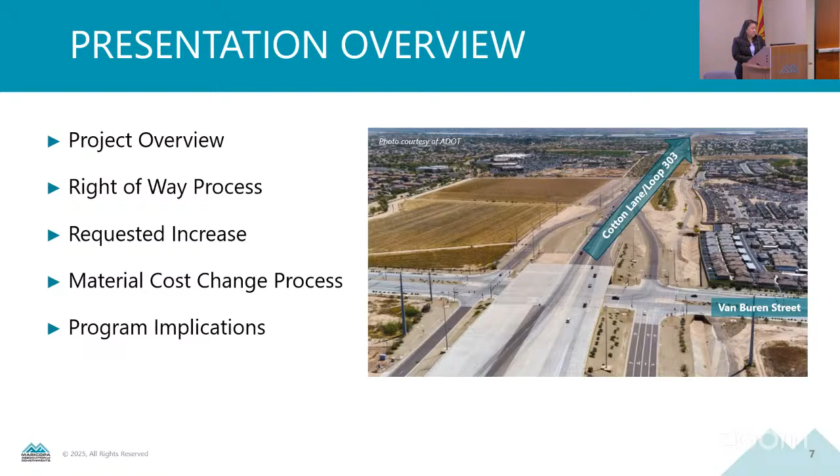I'm here to present the material cost change for Loop 303 from MC 85 to Van Buren Street project. I'll start with an overview of the project and give you a little bit of background about it and how we got to where we are today, as well as the requested increase for right-of-way funding. So let's start with an overview.

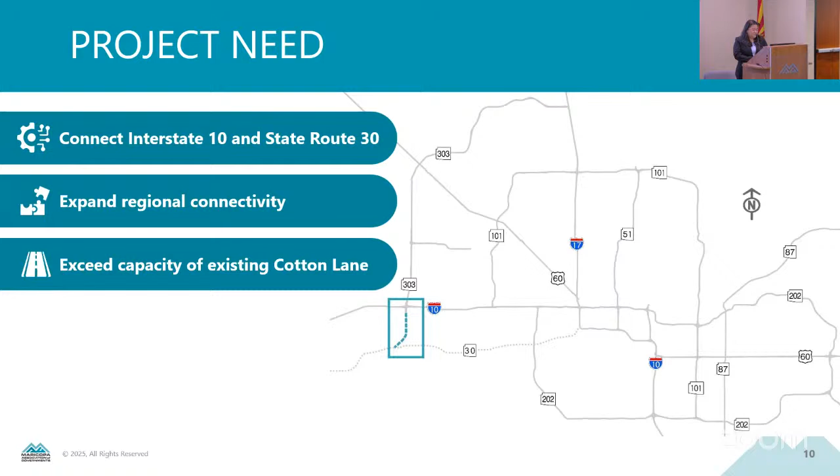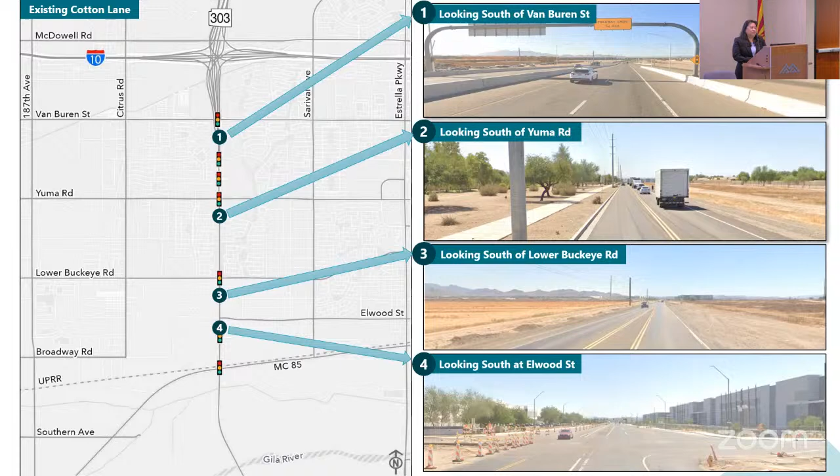Now, the project will be a vital link in connecting Interstate 10 with the future State Route 30. It will expand the regional connectivity in the Southwest Valley. And Cotton Lane today will not be able to meet the expected demand in the future. So Cotton Lane today is generally a 2-lane roadway with 1 lane in each direction, with several signalized intersections in the corridor. Cotton Lane is surrounded by a diverse area that includes agricultural, residential, commercial, and distribution centers.

So ADOT completed the design concept report and identified the project limits as Van Buren Street to Elwood Street. This was the original concept. This would have constructed 2.5 miles of freeway.

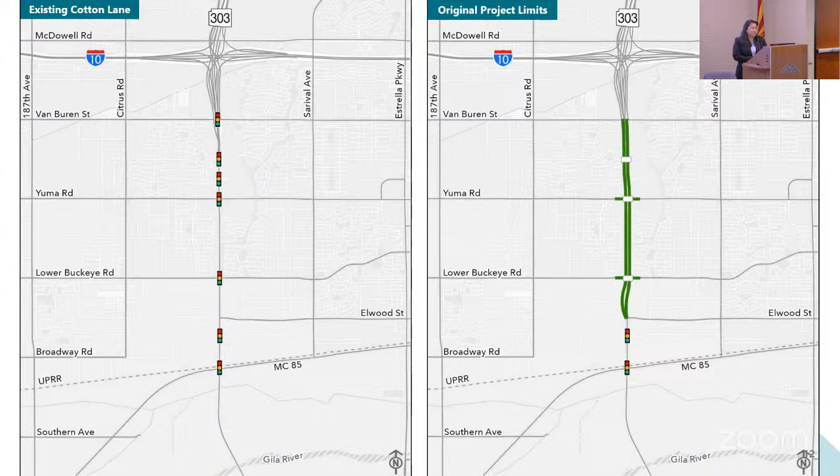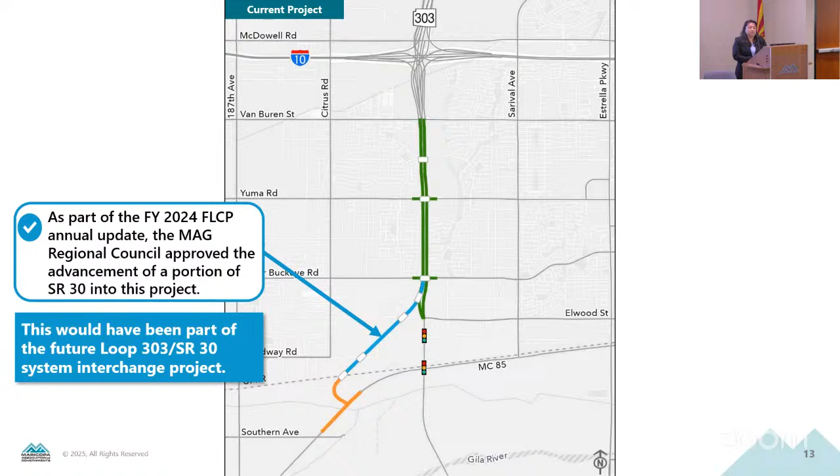Now, as part of the fiscal year 24 FLCP annual update, the MAG Regional Council approved a scope modification to extend the southern limits from Elwood Street to an interim connection with MC 85, shown here by the blue line. Effectively, this advanced a portion of State Route 30 into the current project. This would have been built as part of the future Loop 303 State Route 30 interchange in the future.

The interim connection with MC 85 is identified here in orange. Now, how does this fit with our plans for the future?

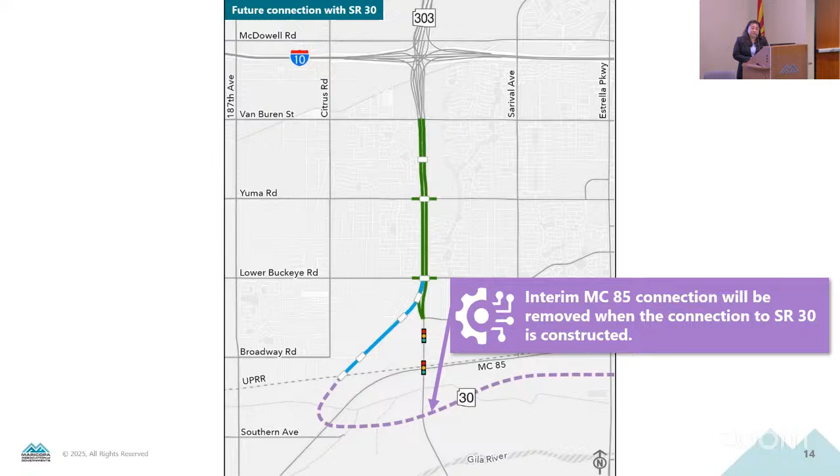So a little more overview: Loop 303, MC 85 to Van Buren Street, will construct 4 new miles of freeway. There will be 3 lanes in each direction north of Lower Buckeye Road, and 2 lanes in each direction south of Lower Buckeye Road. The freeway will be elevated over every cross street, as well as the Union Pacific Railroad. And there will be one-way frontage roads on both sides of the freeway from Van Buren Street to Elwood Street.

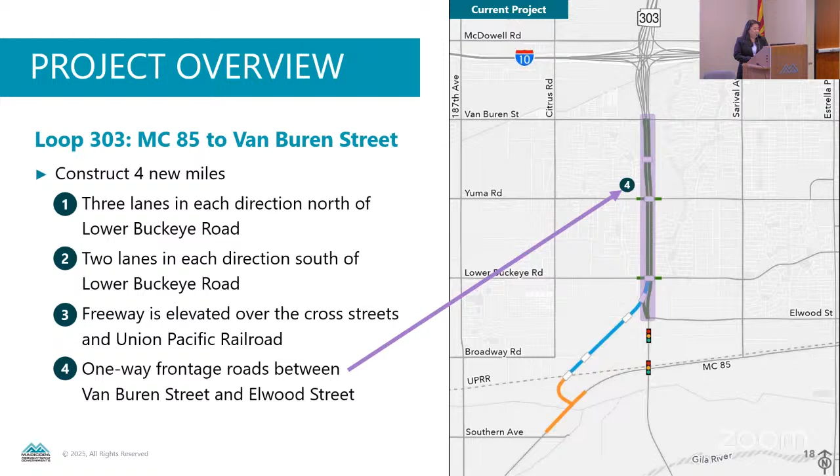Here's the current project schedule. Final design started in September of '21. Right-of-way acquisition began in June of 2022 and is still currently underway. The project is on schedule to advertise for construction in June of this year. Construction will start a few months later and is anticipated to take 3 years.

So let's talk about the right-of-way process. But first, I'd like to take a step back and talk about the overall ADOT project development process. Typically, a project completes a scoping and environmental phase first. This is where the original limits of the project are determined. Then, once that phase is complete, final design will begin. And during final design, there are 2 concurrent processes: utility relocation and right-of-way acquisition. Once clearances are received and final design is complete, then the project can advertise for construction.

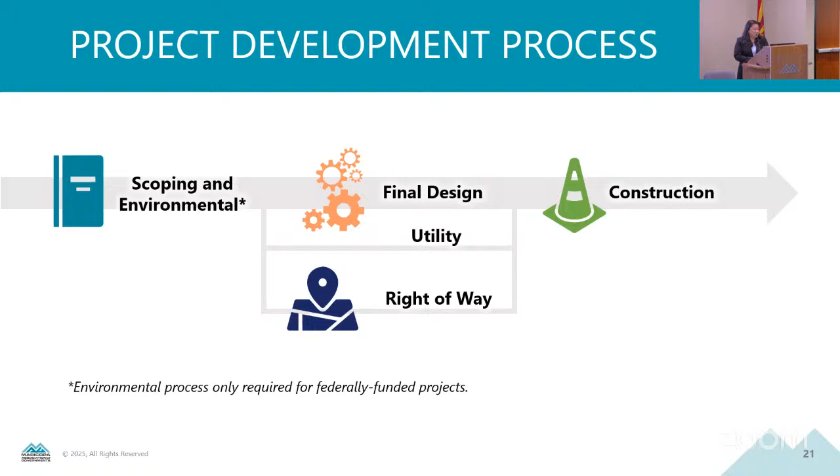So now I'll drill down more into the right-of-way process. During the scoping and environmental phase, preliminary plans are drawn and an early assessment of the right-of-way needs are estimated. During final design, the needs are refined and value engineered, and full and partial acquisition as well as relocation costs are better identified. ADOT will then start to acquire all the necessary parcels, and once acquisition is complete, the right-of-way clearance will be issued.

So based on the DCR, remember that original 2.5 mile project, it was originally estimated that 56 parcels would be impacted. When the limits of the project were extended south, 8 additional parcels were identified, for a total of 64 parcels. As final design refined the needs, that number has actually been reduced to only 47 parcels. But please note the number of full acquisitions increased to 11. So unfortunately, there's no correlation with the decreased number of parcels and the cost of right-of-way. Fortunately, it's quite the opposite.

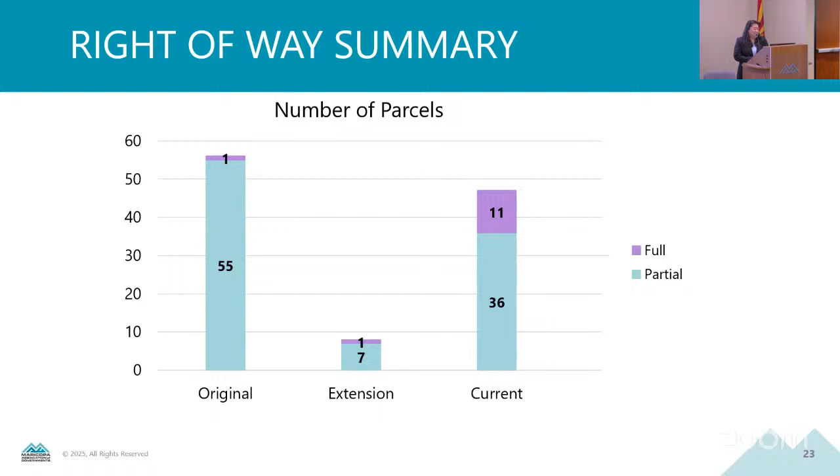The original cost estimate based on the DCR concept was $50 million. Based on actual costs, and the current market trends of the real estate market as well as the housing sector, the estimate today is $170 million. That's a 240% increase. So that leads me to the requested increase today.

I'll touch on the current funding of the project. So it stands as design and utility at $30 million. Right-of-way is currently funded at 94, and construction at $611 million. So that's a total program budget for the project of $735.5 million.

Now, ADOT has requested an additional $76 million. That is a 10.3% increase over the program budget. And if this request is approved, the new program budget would be $811.5 million.

So that large percentage increase triggered a material cost change process. Now, typically this request would be heard as part of an annual FLCP update, but due to the need and the timing of this, the request is being heard independent of that process.

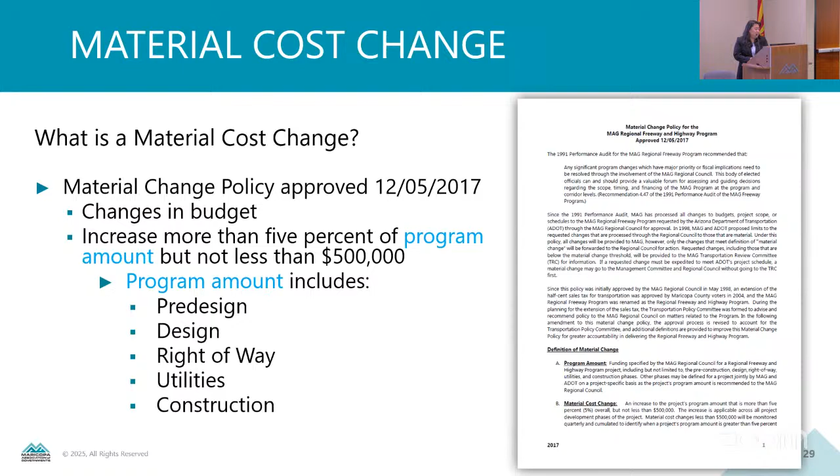So the approval process looks like this. ADOT requested the additional funding. The request is being heard today at Transportation Policy Committee. If the committee recommends approval, this will then be presented to Regional Council for final approval.

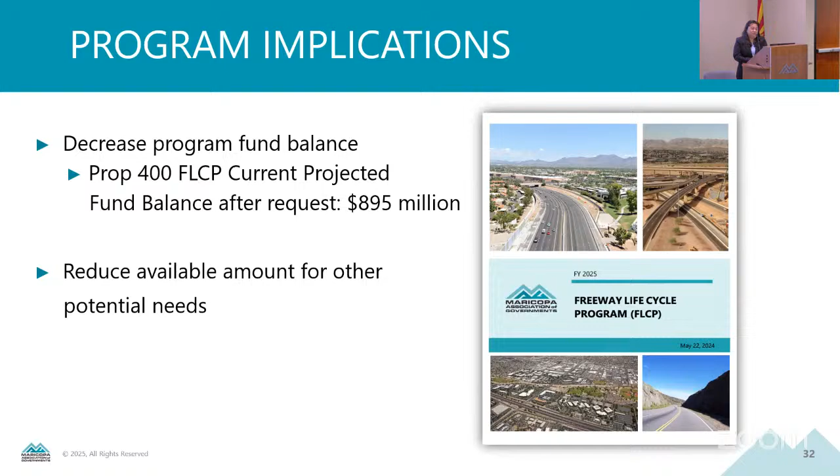What are the program implications of this request? The available program fund balance would be reduced to $895 million. And the request would also mean there would be less available for any future request should they arise from existing projects. And with that, the action requested today is here on the screen.

That completes my presentation. I'd be happy to take any questions.

Thank you, Velvet. Thank you for the presentation. Any questions from the members? Yes, Debbie Lesko. Thank you, Madam Chair and staff.

Can you explain when the original cost proposal took place and why the route was changed so that now we have to pay more for the right-of-way? Since this is my first meeting here, I need an explanation of the process and why we're so off on the cost proposal.

So originally the recommendation was only to construct 2.5, but that would leave us with an end-of-freeway condition at Elwood Street. Not necessarily ideal, but it can function. We had an opportunity to move part of the future SR 30 into the project, which supports our vision of the future. With that opportunity, unfortunately, we needed to construct that new alignment.

So yes, during the scoping phase, they could not have predicted the extension alignment at the time. Unfortunately, it does seem like it probably would have been different had we known the actual alignment at the beginning. So Madam Chair and staff, are you telling me that eventually we would have had to pay for this anyway? We're just extending this project more now instead of later. Is that what you're telling me?

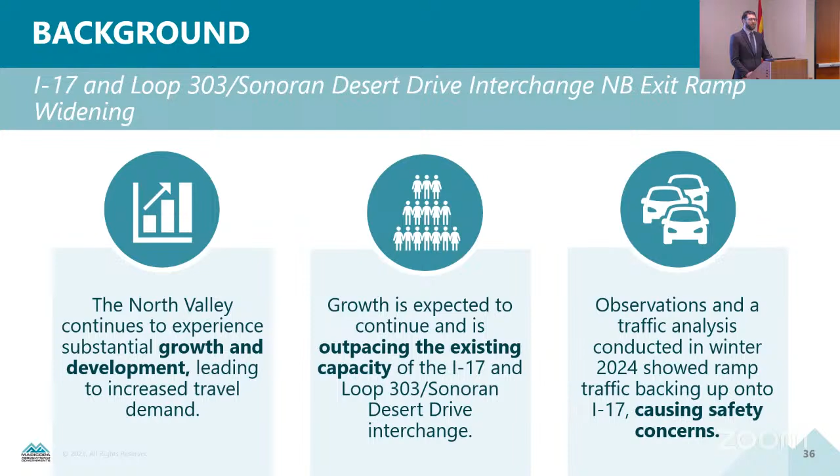The North Valley has experienced and continues to experience growth and development, which has led to increased travel demand. This growth is expected to continue and has outpaced the existing capacity of the interchange out there. We've observed and completed a traffic analysis that showed this congestion backing up onto I-17, which has led to safety concerns.

Just to give you an idea where the project is located, it's in the North Valley at 303 and I-17. I-17 there is north-south, 303 is to the west, and Sonoran Desert Drive is to the east.

This is essentially a freeway to freeway connection. At the time, the signalized interchange was appropriate because of the volume that was going through this interchange. ADOT is currently in the process of designing a full system interchange at this location to address this.

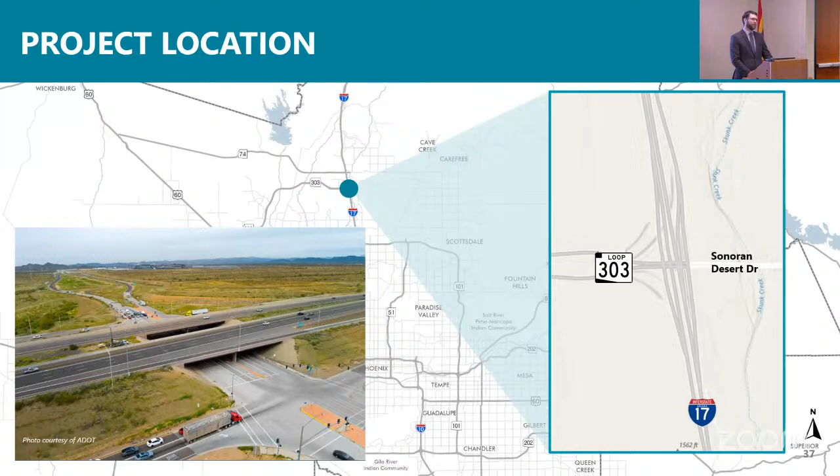This interchange, and Loop 303, is currently being widened through this segment. The timeline for that study is contingent on funding, the timeline for the construction is contingent on funding and is anticipated to be summer or fall of this year, with construction taking 2 years. So it'll be open in summer, fall of 2027.

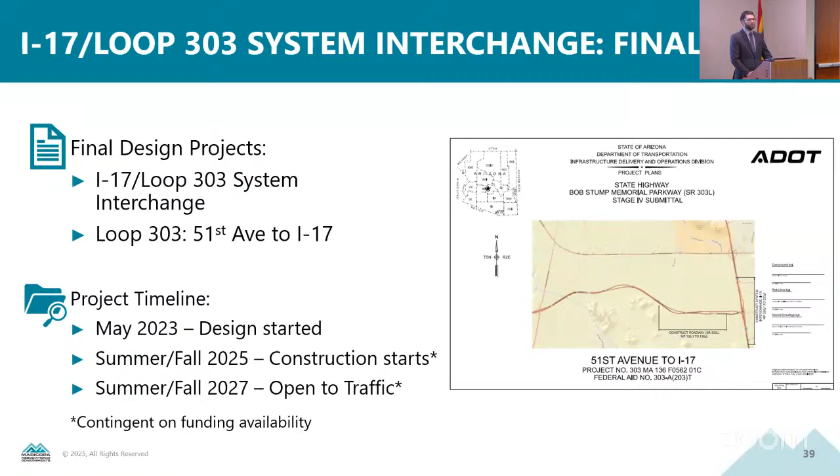Just a quick overview of the Freeway Lifecycle Program. It's a management tool for the freeway and highway projects that are funded through Proposition 400. It includes a minor improvements fund for small projects that are on a quick timeline so that there can be quick responses to projects that come up like this.

That pose safety concerns. $10 million is allocated to this annually, and this agenda item reflects a request for $2.1 million and is the third minor improvement allocation request of fiscal year 2025.

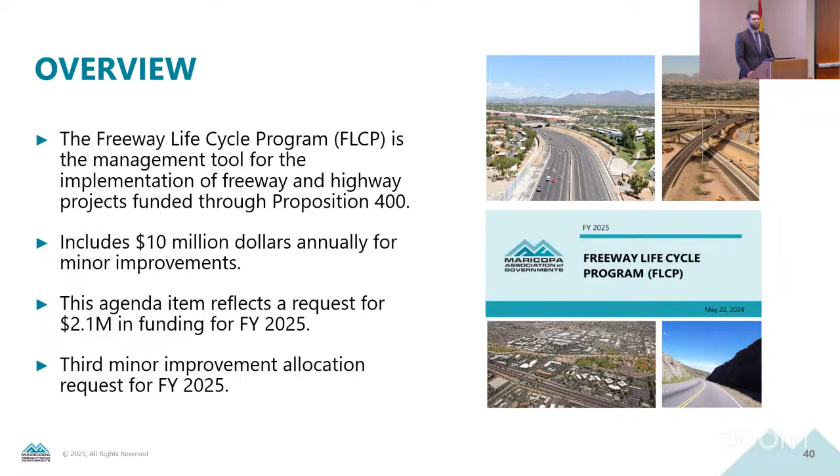So like I discussed earlier, this typically would be a system interchange with flyover ramps where vehicles would not be stopping through a signalized intersection. And with the project that is coming up, it's going to take at least 2 years for that full system interchange to be constructed.

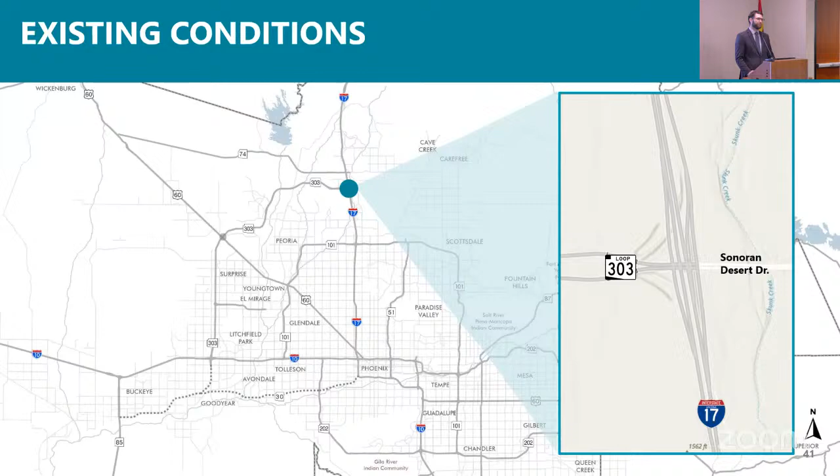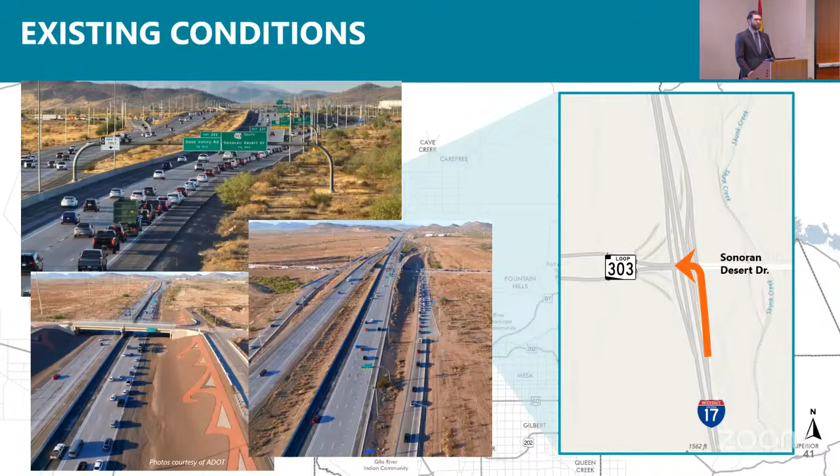Here's an enlarged picture of that. Really the reason why this is a safety concern is that when vehicles are backing up on I-17, it causes unexpected stops on I-17. It causes large speed differentials between lanes. There is queue jumping that's happening. And then in these situations, there tends to be more erratic driver behavior. So all of this combined together causes greater safety concerns.

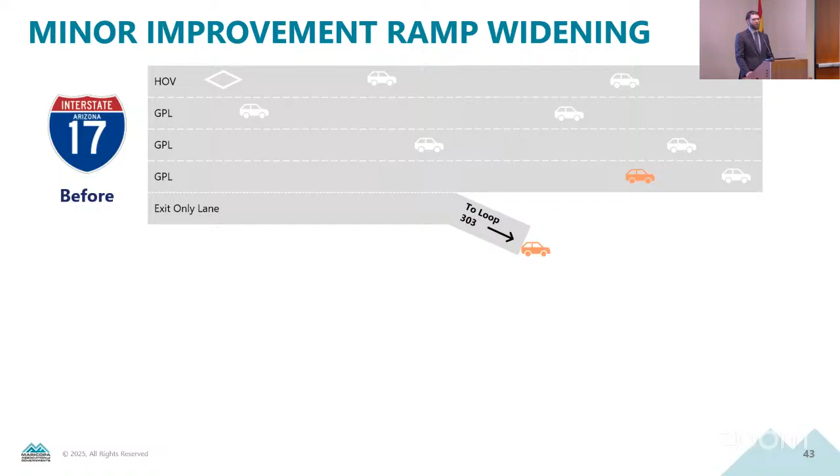So what is the proposed solution for this area? The current condition is that there is a 1-lane exit, and to get off I-17 you have to be in the rightmost lane. In the second rightmost lane, you continue to the north on I-17.

The proposed solution would be to widen the northbound exit ramp to 2 lanes. This would allow the same conditions as we have today, where you can get off on the rightmost lane, and then in the second rightmost lane you can continue to the north. But it would also allow for 2 lanes to exit I-17.

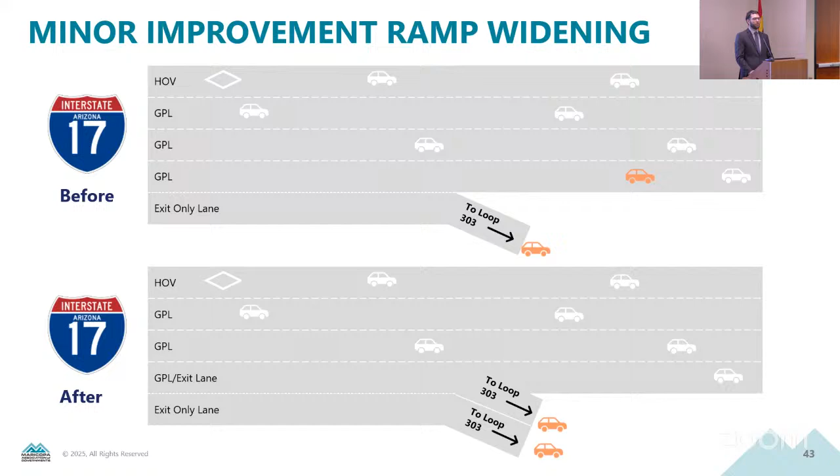What this does is it increases the number of vehicles that can exit the freeway, but then it also increases the storage capacity on the ramp so that there's more room for vehicles to be stored on the ramp and not back up onto the freeway. An added benefit is that the improvements are fully compatible with the future system interchange project and will actually help with traffic control during the construction of that project.

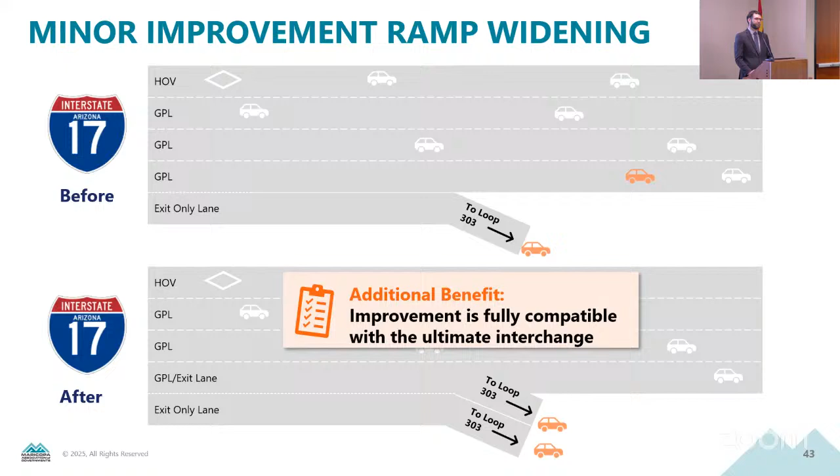So the schedule: pending approval of this funding request, we can advertise for construction at the end of this month or early next month. And construction is anticipated to be completed before the end of the year. With that, that concludes my presentation, Mayor Wheatley and members of TPC, and I'm available for any questions.

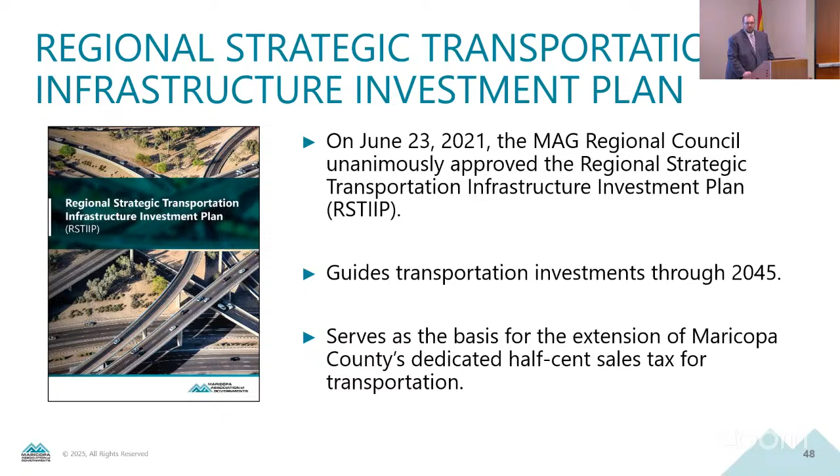To begin with, some context: the region's plan, the Regional Strategic Transportation Infrastructure Investment Plan, or RSTIIP for short, was approved by the MAG Regional Council back in the summer of 2021. That represented the conclusion of more than 4 years of planning effort with significant public engagement. Ultimately, that plan guides investments through the end of 2045, and served as the basis for the extension of Maricopa County's dedicated half-cent sales tax with Proposition 479.

Implementation of the RSTIIP occurs via one of 4 different mechanisms, or vehicles. We have the 3 modal programs, and then funding set aside for the competitive programs allocation. Today's conversation will focus on the freeway element, and specifically our task to take the planning-level work that was done and put it together into an actual program for implementation.

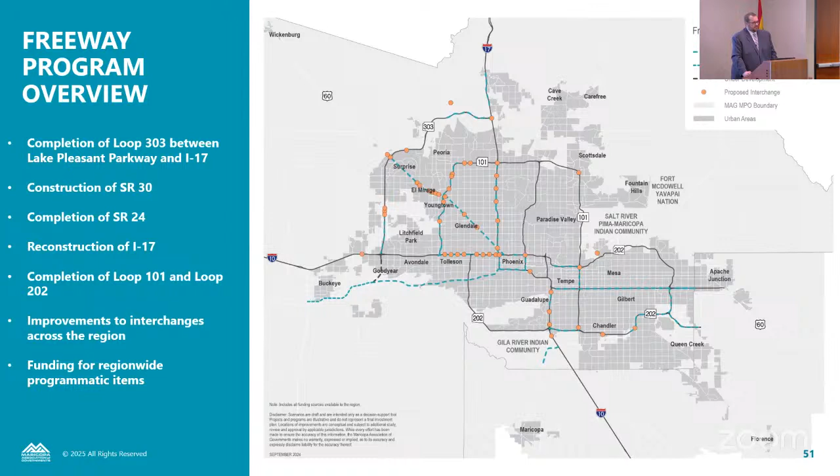Back in 2021, with the approval of the RSTIIP, there were a total of 79 projects identified for funding through the end of 2045. There was also funding identified for programmatic line items, whether that's the minor improvements allocation we just heard about, funding for litter and landscaping sweeps around the Valley Freeway system, or funding for advanced design and advanced work.

Really our task now is to move into implementation. We have some statutory requirements we need to fulfill. We have to go through the exercise of updating all the costs and revenues. We've spent the last couple of months talking costs, and we know we're going to have some challenges there. We also have to establish specific project sequencing. When we put the plan together, we identified implementation of projects within 5-year terms. Now we need to drill down on what those exact years will be.

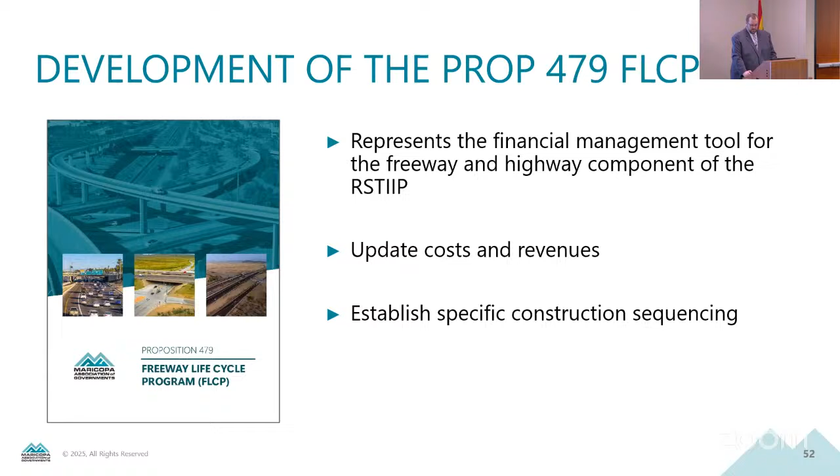When we talk about developing the Prop 479 freeway program, there are 3 separate considerations we need to work through. The first is a statutory requirement we must fulfill: state statutes dictate that we come up with a financially balanced program. That's where the concept of a life cycle program stems from. In simple terms, as we put together the program, the estimated cost between now and 2045 cannot exceed the amount of revenues available to us.

The second consideration is that we need to focus on near-term project sequencing. Prop 479, the half-cent sales tax, begins collections in 2026.

That's a relatively short time away from now, particularly when you're talking in transportation terms, where 5 years is quick. And a lot of time has changed between where we're at today and when the plan was originally approved back in 2021. We traditionally do these life cycle program updates on an annual basis.

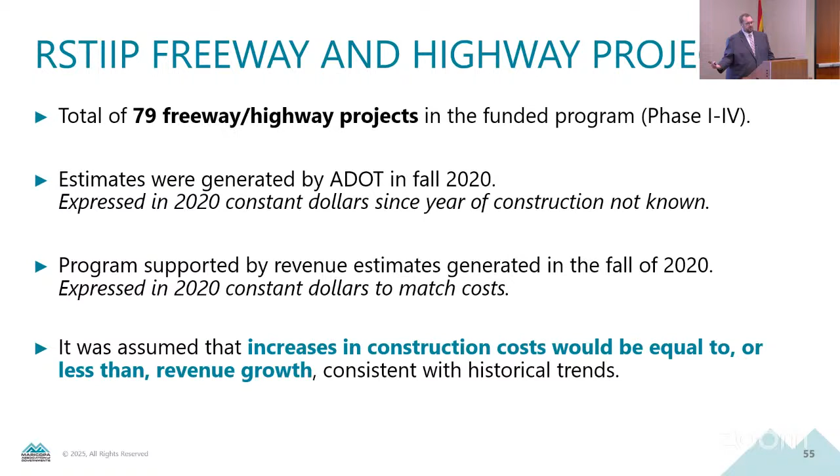We also went through an extensive process to estimate revenues between now and 2045, again done in the fall of 2020. The working assumption at the time, in line with what we've seen historically in this region, was that any increase in construction costs would be offset by increases in revenue. Traditionally, we see larger revenue growth than construction costs. However, if you recall the presentation last month, unfortunately that is not the case over the last 4 years. We've seen historic construction cost increases.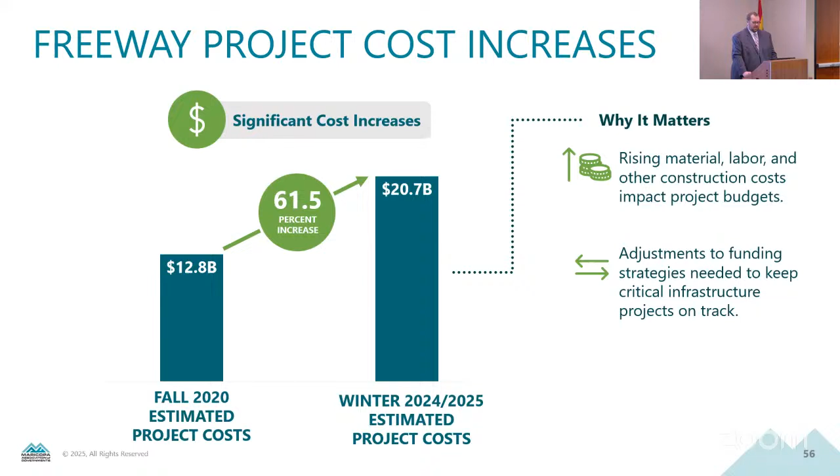So the total amount of estimated costs for the 79 projects back in the fall of 2020 was $12.8 billion. We recently completed the exercise with ADOT to update all those costs, and we are now sitting at $20.7 billion. In total, this is about a 61.5% increase. Truth be told, it could have been a lot worse, so fortunately it's not quite as bad as we were originally anticipating. But last month we talked through a lot of those factors that were really driving this cost increase.

On the plus side, we have seen an increase in revenues. You might recall this chart from last month's presentation, showing all the different revenue streams that flow into the Regional Investment Plan, the RSTIIP. So while we talk a lot about the dedicated half-cent sales tax, that's not the only source. When we're talking about the freeway program, there's actually 3 different sources that flow into it: the dedicated half-cent sales tax, a portion of funding through the State Highway User Revenue Fund, or HURF, and a portion of the federal formula funds that flow to ADOT and are sub-allocated into Maricopa County.

So what we found when we updated those revenues into the freeway program specifically is that we're looking at a roughly $4.2 billion revenue increase, in constant dollars, between where we're at today versus where we were last fall. When you add it all together, contingent on some of the assumptions you're making, over the life of the program between now and 2045, we're estimating a program deficit between $2 and $3 billion.

However, the good news is that, depending on what assumptions we use, the program is largely in balance through the end of phase 2. That's very good news because those are the near-term projects. So we have about 10 years of the program being in balance, and then it goes out of sync. As a result, if you look out 10 or 11 years, there's a lot of variability associated.

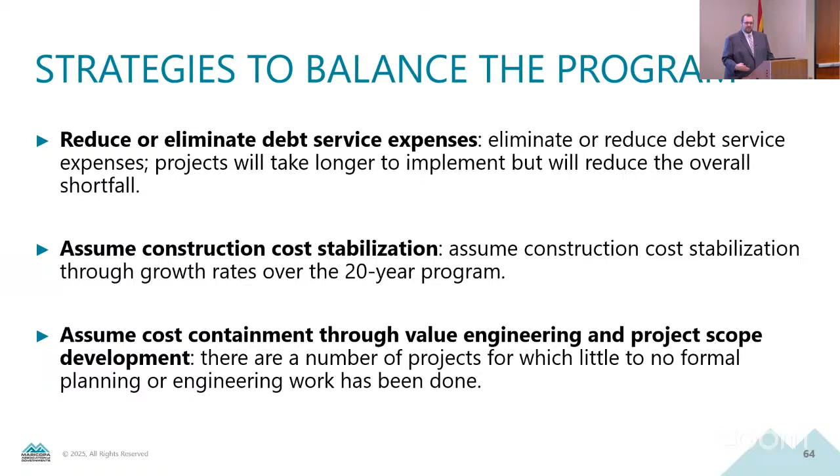I want to walk you all through a quick example. This is a relatively near-term example. And to do this, I really want to key in on a system interchange. I'm just using this as an example—you might be familiar with this. This is what we call the North Stack, at I-17 and Loop 101.

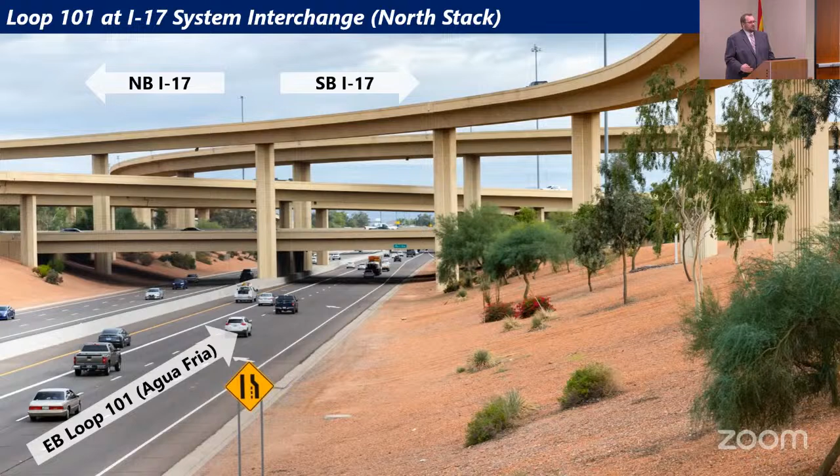Specifically, put yourself in the position you're driving east on Loop 101, approaching I-17. You can either go north to I-17 or south on I-17. When we look at a system interchange with those big ramps, we have different levels—you can think of it as stories of a house to separate traffic. You have the first level all the way down at the bottom, and you go all the way up to the fourth level. As you might imagine, when you're building structure high in the air, it costs a lot of money. So that's something you have to take into consideration, particularly when engineers are looking at things like the curve radius or how quickly cars need to get from point A to point B.

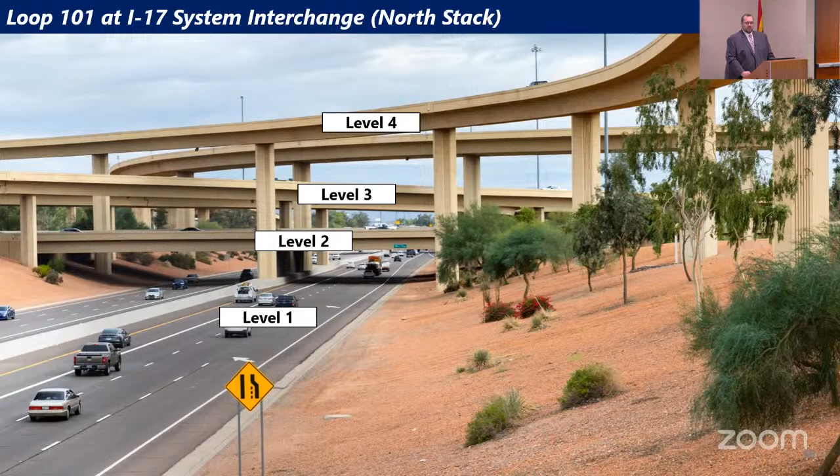So what we've done over the last couple of months is key in on the State Route 30 Loop 303 system interchange, illustrated here. As Ms. Matthew indicated during her presentation, we finished the DCR a number of years back, so we have some degree of formal engineering work. Well, at the time, we didn't know what the actual implementation of the project would be. We didn't know which portion would come first or which portion would be in a future Prop 479 plan. So the concept was laid out based on ADOT's best guess at the time.

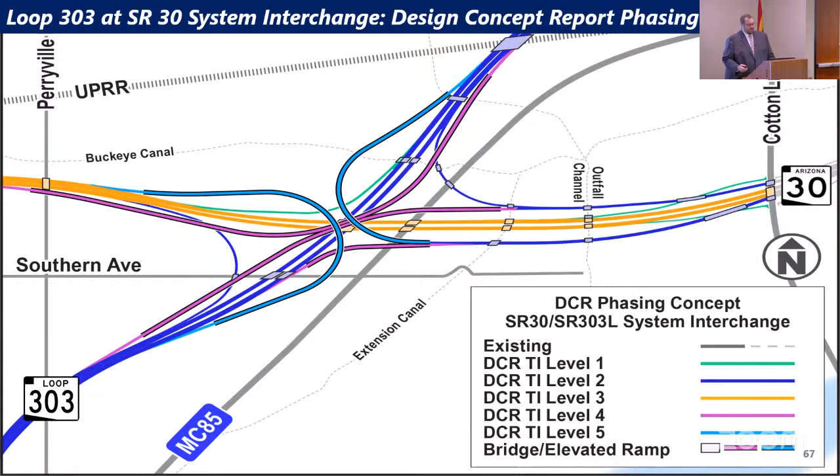One of the things we've done over the last couple months is gone through a fairly extensive exercise to figure out: is there a better way to do this? What ultimately ADOT and the engineering team came up with is that we actually have a better idea of when the projects will be sequenced. For instance, a Loop 303 extension further south of State Route 30 is not funded in Prop 479. So why would we build that on a low level when we can prioritize lower levels? So what we actually did is what's called restacking of the interchange—we just reconfigured the levels, no other changes. This resulted in a cost savings to the Prop 479 program of $128 million.

So that's a great example of a fairly simple solution that we were able to put forward as a result of additional design and engineering work that has a direct savings to the Prop 479 freeway program that you'll see reflected. This is an exercise that we want to go through. We're certainly not going to get this all done in two months, but we want to look at those projects, identify opportunities to save funding. Ultimately, as we build the program, we assume there's going to be continued levels of this value engineering exercise to help bring the program into balance and close that gap.

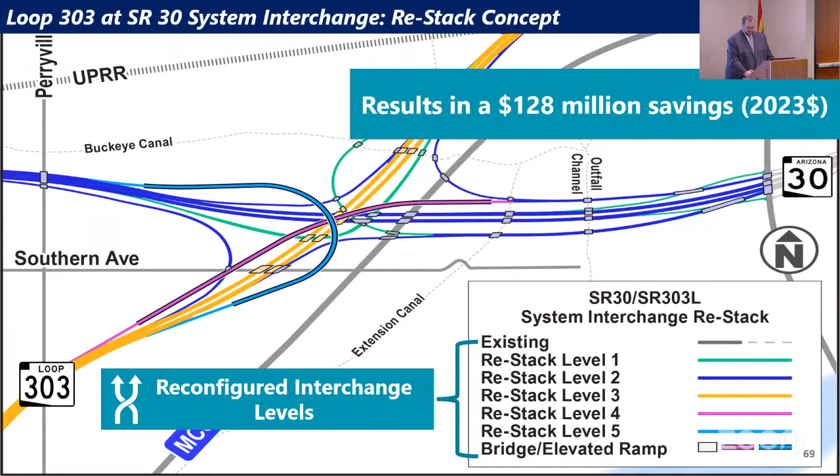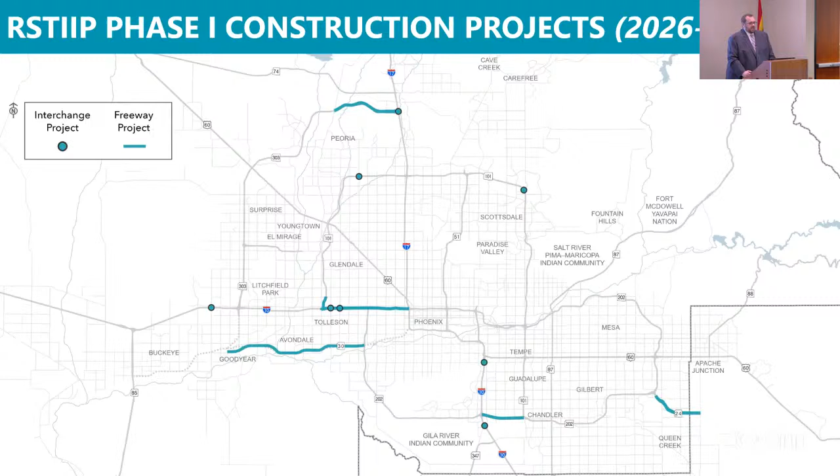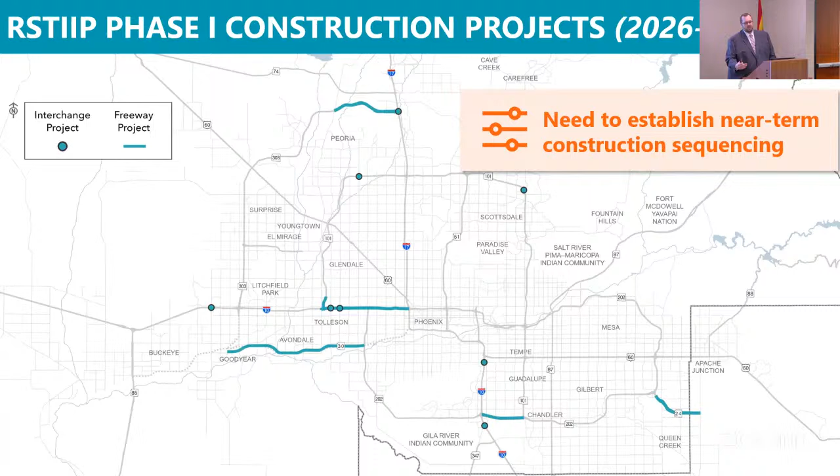Next item I want to talk about is near-term project sequencing. As I had mentioned earlier, when we originally developed the program, we did so in 5-year increments. We identified projects that would move forward in phase 1, with construction at some point between fiscal year 2026 and 2030, but we didn't actually identify the specific year those projects move forward. What you see here is a map of all those phase 1 projects. Now we need to go through the exercise of figuring out which projects go in fiscal year 26, which go in fiscal year 27, and so on. I want to walk you through some of those projects and our initial proposal.

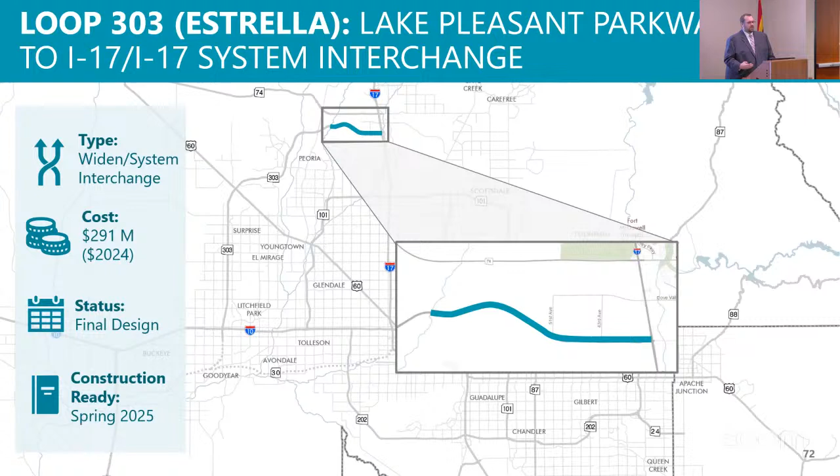The first one, to revisit an item you just heard about, is Loop 303 from Lake Pleasant Parkway to I-17, as well as the system interchange. This is a project for which the state had appropriated funding a few years back to do the final design. Final design is long underway and will be finished sometime this spring. This project will be ready to go to construction this spring. What we're recommending, after doing an assessment of the Prop 400 program, is that we have funding available to actually accelerate these improvements to fiscal year 2025, so we can accelerate ultimate construction of this project to sometime this summer.

In part to help accommodate this, there are a couple of projects in the Prop 400 freeway program that make sense to push back. A great example is the I-10 at Sky Harbor West interchange improvements. In the Prop 479 freeway program, we have larger improvements planned for I-10, so it makes sense to do that project as part of the bigger project itself.

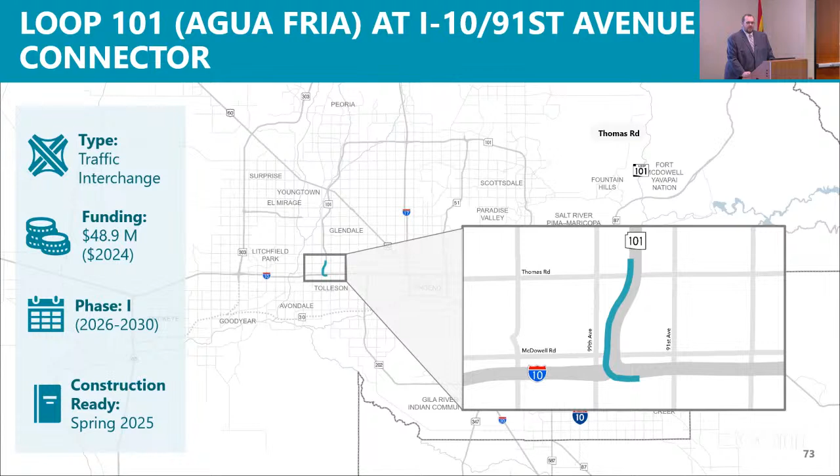Second project, over in the West Valley: Loop 101 at I-10, the 91st Avenue connector. In the current Prop 400 project, we have what's called a directional HOV ramp currently funded for construction, set to go out this summer. The limits of that project are almost identical to this 91st Avenue connector. What we're recommending, since we're going to be out there doing construction anyway, is that we advance this from phase 1 to fiscal year 2025 and construct those improvements concurrently. I also want to note this is one of the few projects for which the cost estimate actually came down, in part because constructing it at the same time helps save a lot of money.

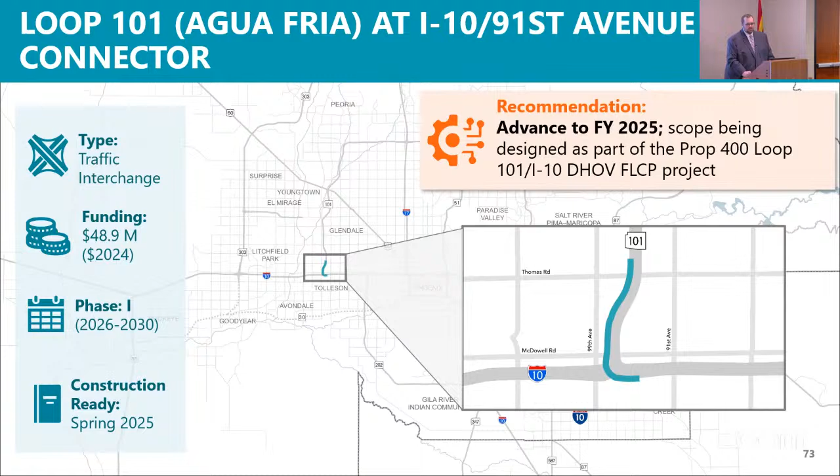Next project: I-10 at Jackrabbit Trail. This project is currently in final design. We are recommending that we program construction in fiscal year 2026 so this project can start as soon as it's ready. This is another area of the valley seeing a lot of pressure. We did a presentation specifically on the Southwest Valley, which is seeing significant pressure at this interchange and needs improvement. It's another example of an interchange where you see backups onto the I-10 main line.

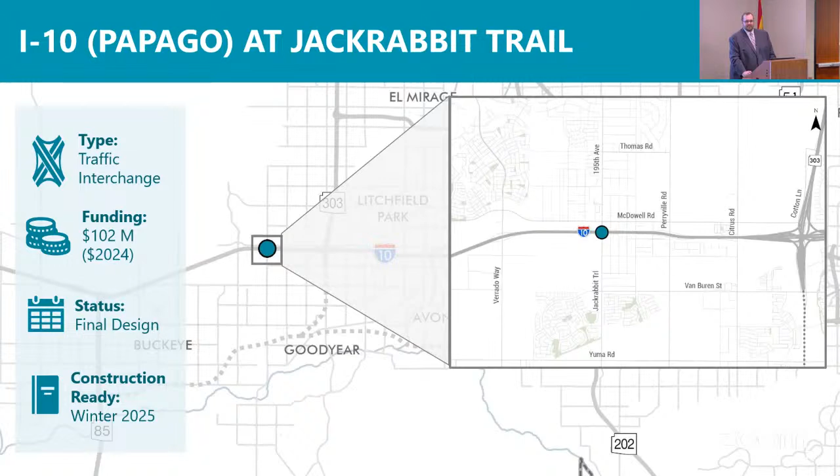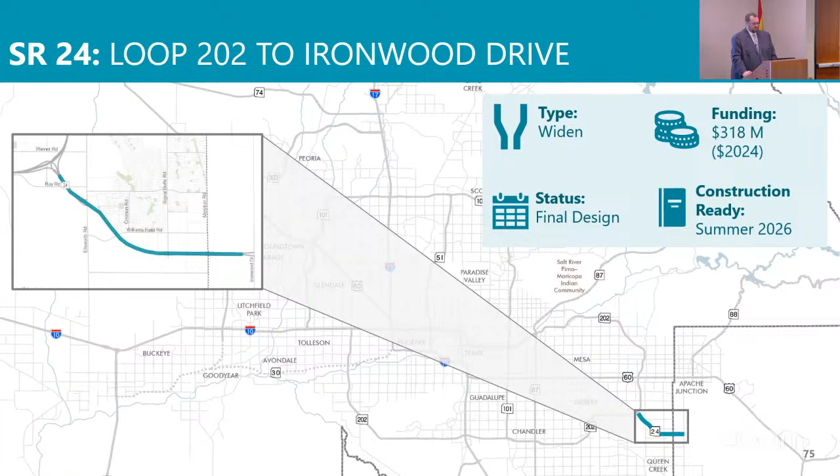Out in the Southeast Valley, State Route 24, Loop 202 to Ironwood Drive. As part of Prop 400, we built an interim freeway with 2 lanes in each direction. If you travel along 24, you'll notice you have to stop at stoplights, because you're actually getting off on the future traffic interchange ramps. We have funding in 479 to turn this into a full freeway. It's under final design now, and we're recommending it be programmed for construction in fiscal year 2026 as soon as final design completes.

And then the next project, State Route 30. As we look at that center segment of State Route 30, it's actually broken up into 6 smaller segments. It's set to be constructed from the eastern portion of the facility moving west. The first portion of that facility set to go to construction is the segment between 97th Avenue and Loop 202, the South Mountain Freeway.

This is under final design. Of course, there's been extensive efforts for advanced right-of-way acquisition for utility work. So we're recommending programming this portion of State Route 30 in fiscal year 2027, which is ultimately when the final design will be ready and that facility will be ready to move forward.

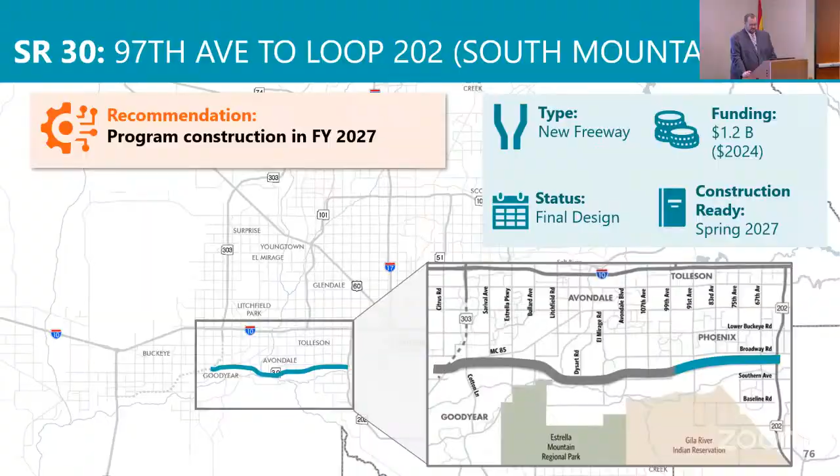The last element for consideration in developing the Prop 479 freeway program is adjusting projects and phasing. As I mentioned, the plan was approved nearly 4 years ago, so things have changed, conditions have changed. You've seen development patterns within your own jurisdictions change, priorities change, traffic patterns change. As a result, there are some projects for which we're recommending we consider potential changes in phasing as well as project scopes. I want to walk this body through what our proposal is.

So first, State Route 30. Here's a map to help orient the committee to State Route 30. There's a western project between State Route 85 and Loop 303, the center segment between Loop 303 and Loop 202—this is the project we spent a lot of time talking about today—and then the eastern project between Loop 202 and I-17.

The center segment is actually the biggest priority as you're looking at State Route 30. That's the section of the freeway that takes the most pressure off of I-10, that carries the highest volume of traffic. It's particularly important as you look at freight connectivity and the development out there.

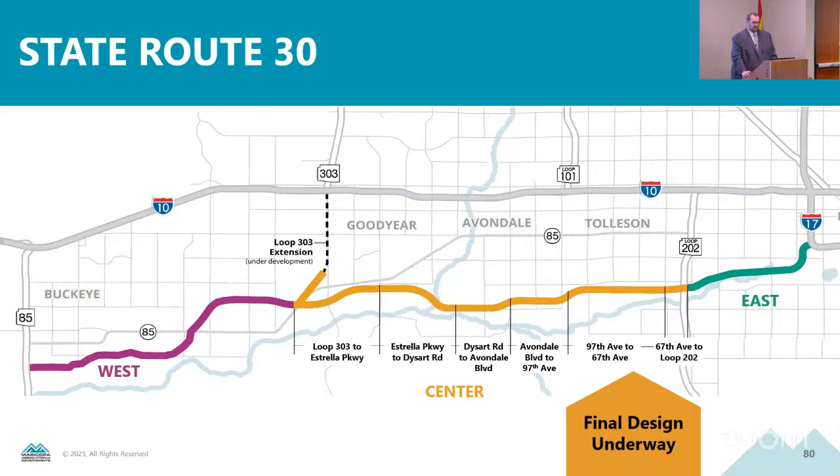As I mentioned, we have final design underway. We've proposed initiating construction for that first portion in fiscal year 2027. But what we need to do is dust off our implementation plan that we put together back in 2021, and figure out what the actual sequencing of this facility looks like. It's a very expensive, very complicated facility. There are a lot of considerations—there are high voltage power lines, water lines that go in and out of Palo Verde that conflict with it.

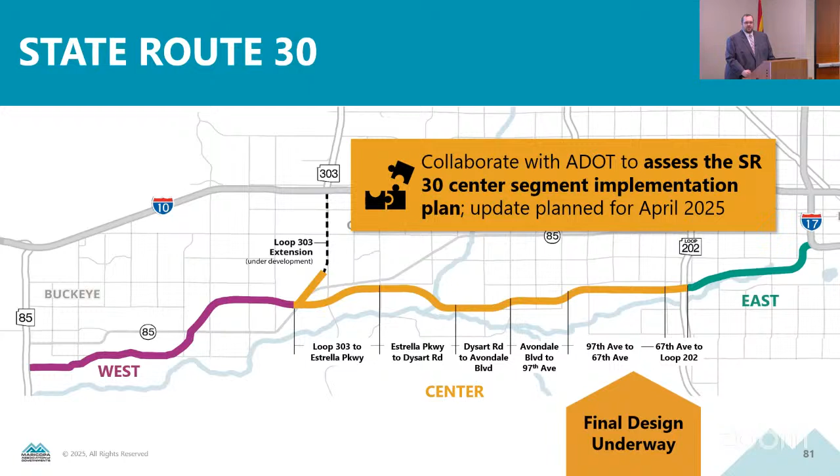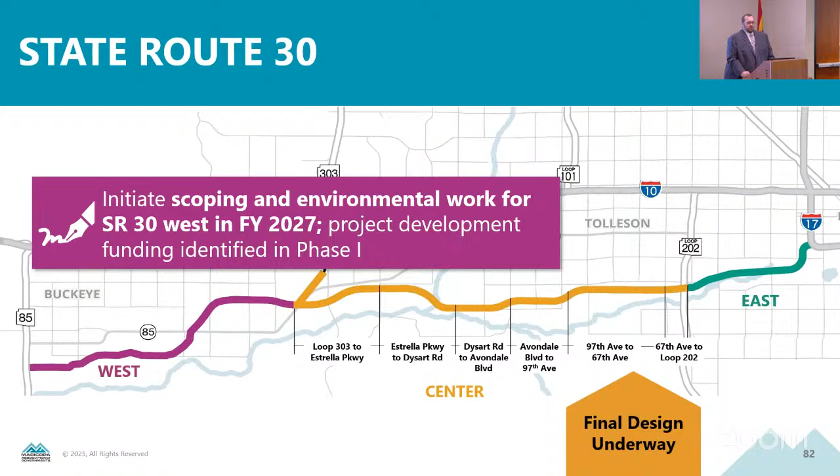So we're intending on working with ADOT over the next couple of months to figure out what the implementation plan for the center segment is, and intend for a presentation in April to walk through that. As part of the investment plan, funding was also allocated to initiate that very first phase on SR 30 West—to identify what that corridor is, what that alignment is, and an implementation plan. We're recommending programming that work to initiate in fiscal year 2027.

Next, I want to look at the Northwest Valley. As part of the plan, we had funding identified for a new traffic interchange between US 60 Grand Avenue and El Mirage Road at Loop 303 and Litchfield. Well, there's been a lot of work underway—we have a big study underway. We've been working with ADOT to figure out if there's a better interchange location, or a different location, that will help relieve or alleviate some of the pressures we're seeing out there.

What we actually found is that we've identified a location for a new interchange at Loop 303 and 155th Avenue. This is really important for a couple of reasons: number one, it helps relieve some of that pressure we're seeing; number two, if we were to construct ultimate improvements at Loop 303 and US 60, absent a second way in or out, the traffic challenges residents are feeling out there are only going to be exacerbated. So we need additional connectivity, a different way in and out. We're actually recommending we exchange funding for the Loop 303 at Litchfield with the Loop 303 at 155th Avenue.

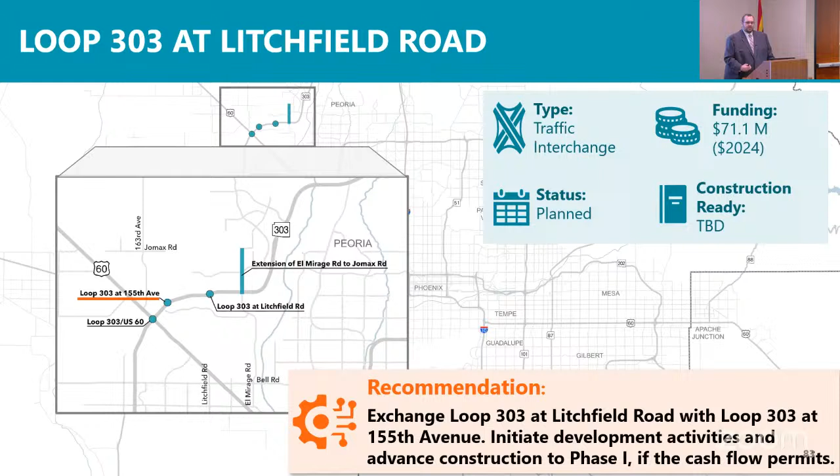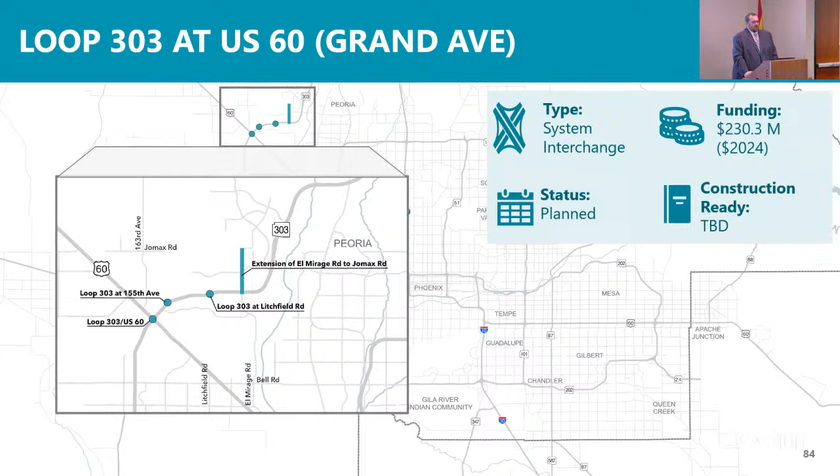And that, depending on the cash flow, if we're able to advance this into phase one, we do so. Also at Loop 303 US 60, this is another area where just over the last 4 years we've seen significant growth. So we're recommending we initiate development activities for that full system interchange, which is funded in the plan, and again look at the cash flow if we're able to advance those improvements to phase two.

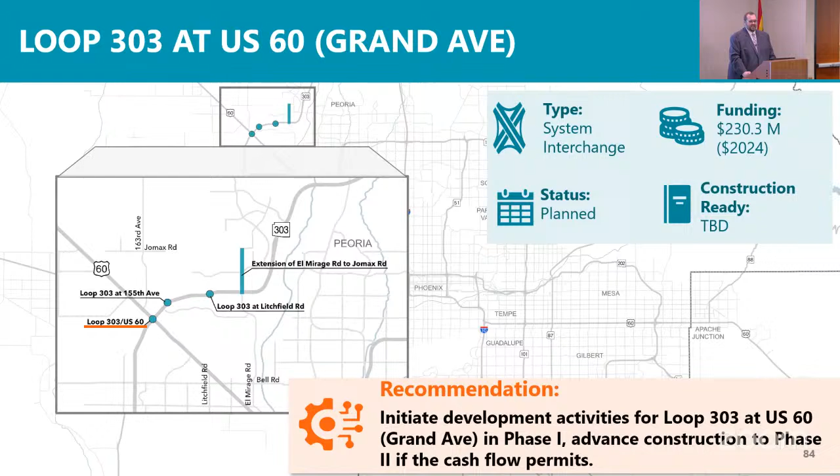Moving south at State Route 347, I-10 to Riggs Road. 347 is a very important corridor, the major lifeline in and out of the city of Maricopa. This corridor is congested, heavily congested. There are a lot of safety issues and a lot of challenges.

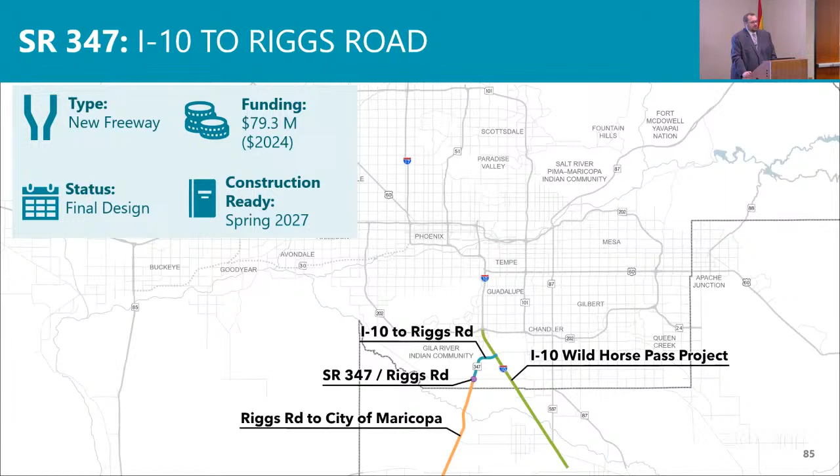Final design is underway. City of Maricopa and a lot of folks have been working to secure additional legislative funding. We have funding as part of the Prop 479 plan for the Maricopa County section of it. So all we're recommending is that we position the Maricopa County portion of that project to be able to move forward if City of Maricopa and others are able to secure additional resources to build the Pinal County portion. It's really important that we build this project together.

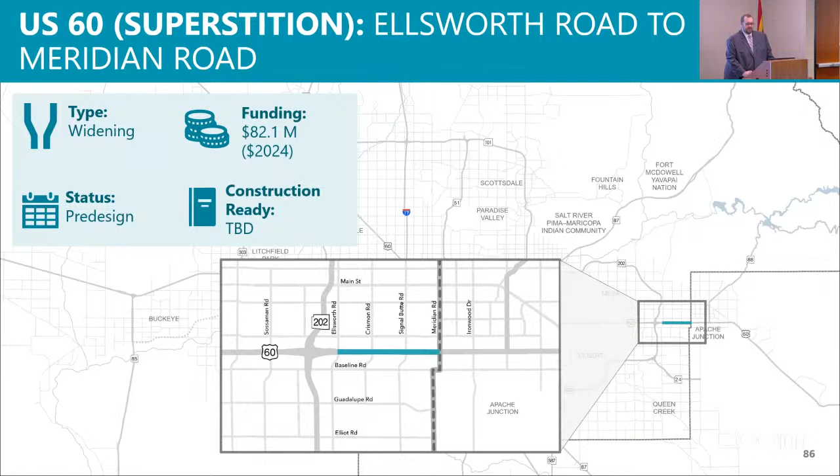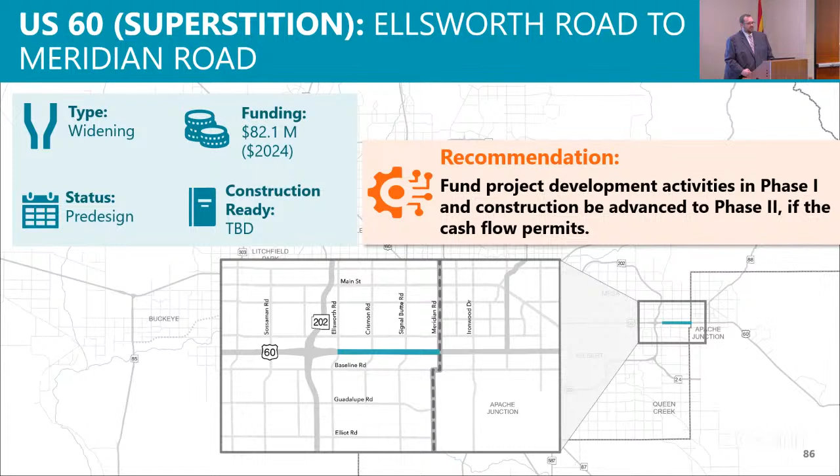Looking at US 60 out in the East Valley, Ellsworth Road to Meridian Road. US 60 is a facility between Loop 101 and the Superstition interchange that sees as many as 12 lanes, eventually tapering down to 4 lanes. This is another area where we're seeing a lot of traffic impacts due to growth. So we're recommending that we advance project development work into the first phase, and then if cash is available, advance construction into phase 2.

Finally, we have funding set aside for the rehabilitation of pavement around the region. We've been working with ADOT to come up with a priority list. That has been included in your agenda packet today. Our recommendation is that we follow the priorities set in that list to really address those portions of the system that need immediate relief. Specifically, look at the Loop 202 around the downtown area, as well as State Route 51 - that pavement is in rough shape. Our recommendation is to follow that priority list.

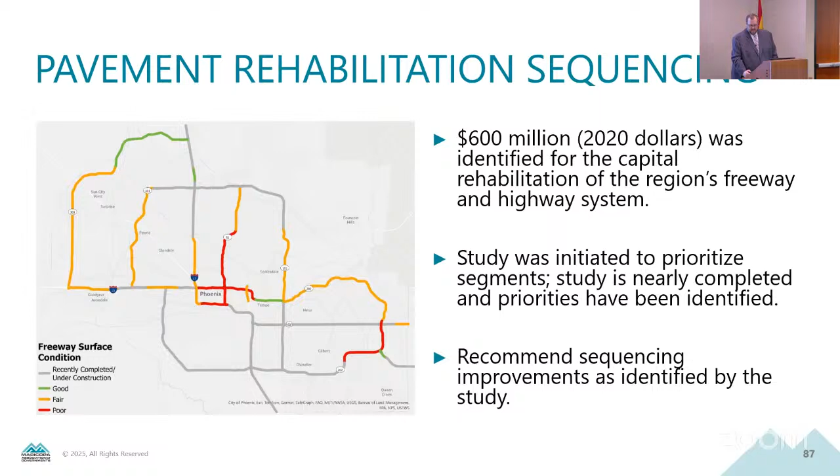Today's conversation is intended just to socialize some of the concepts, to get additional feedback. Based on the feedback provided by this group, we'll go through the exercise of actually building the specific program itself, and bring that back to you all for additional consideration in April. Then if everybody's in agreement, we'll look to move that forward for action sometime this summer, as soon as May or June. So with that, Madam Chair, that completes my presentation. I'd be happy to answer any questions.

Thank you so much for this presentation, John. I appreciate MAG preparing us for this conversation over previous presentations. When I look at an increase of, was it 61% overall, I have to just look at the positives. We're coming into 479 with an 895 million surplus at the end of Prop 400. We have a positive fund balance through 2035, which is phase 3. So I appreciate this presentation again and support MAG in applying a more incremental measure. It allows us to get past this high inflationary period we're experiencing, as long as we're meeting state statute. I do support that approach, as well as the strategies to balance reducing and eliminating debt service, the value engineering, and project scope development. I appreciate the work that has been done thus far, recognizing this is definitely a moving target, and we're doing the best we can, and recognizing an incremental approach is appropriate from my perspective.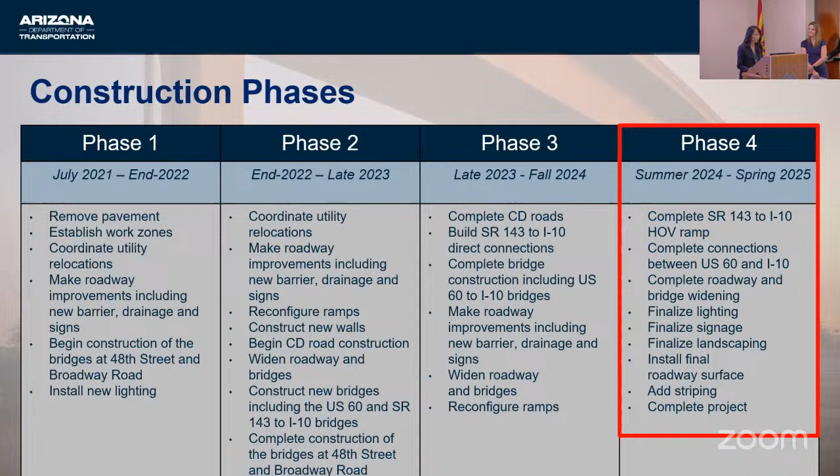As I mentioned earlier, we are very close to the end of the construction process for this project. We are in the fourth and final phase. During this phase, crews will complete work on the interchange reconstruction at SR 143 and I-10, and at I-10 and US 60. Crews will also work on finalizing the lighting, landscaping, roadway surface work, and installation of striping. Now I'll talk about some of the construction highlights from last time we presented to TPC.

We're going to start on the west end of the project at the I-10 bridges over the Salt River and then move our way east. What you're seeing right now is the placement of the concrete bridge girders for the new I-10 bridges over the Salt River. This bridge is being widened to add 2 additional travel lanes in each direction.

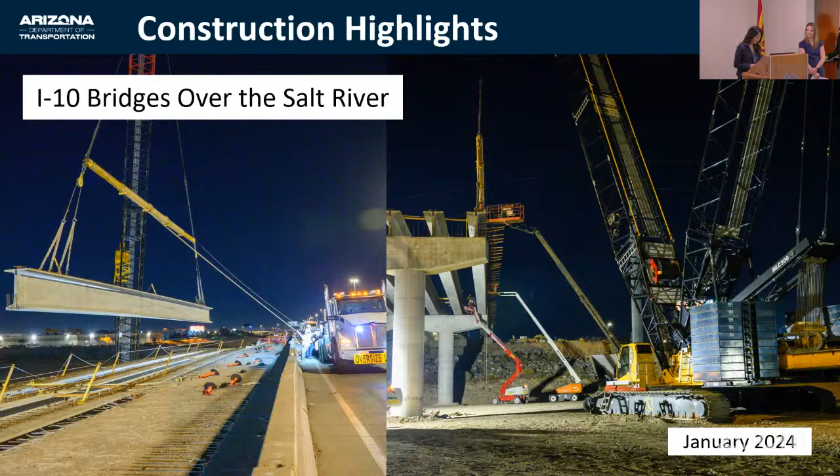And this is what those bridges look like now. This photo was taken about 5 days before the new additional lanes on I-10 opened in both directions. You can see where the original bridge was, the lanes on the original bridge, and then the added portion of the widened bridge here.

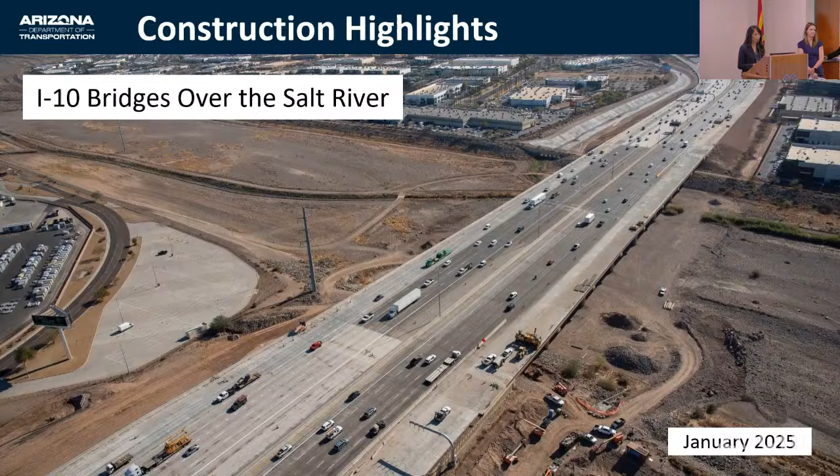Moving east to I-10 and 32nd Street, crews had to reconfigure the on and off ramps at this interchange in order to widen I-10. It took crews about 40 to 65 days to reconstruct each ramp. From January to October, about 10 months, to completely reconfigure the on and off ramps at I-10 and 32nd Street. Those are now open to motorists and are being used.

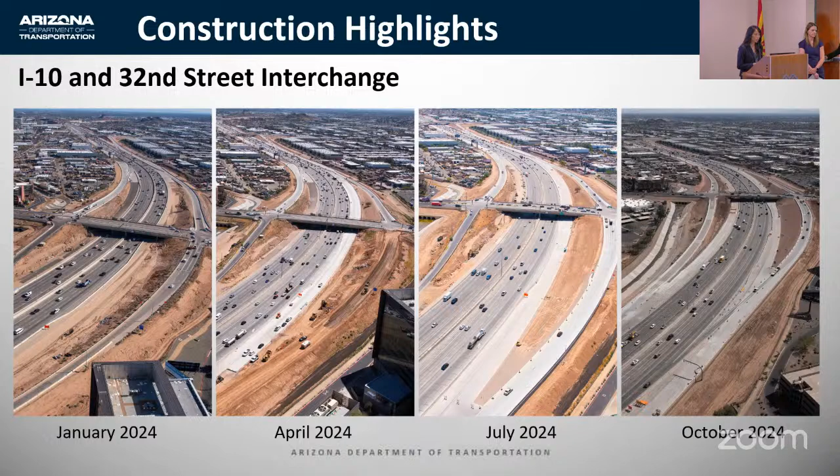If you've driven through the I-10 and SR 143 interchange, you've probably noticed a lot of work taking place here. Let's see if I can get this time lapse to play. Oops, it is not playing.

Construction for this interchange included new transition ramps from southbound SR 143 to eastbound I-10, and from westbound I-10 to northbound SR 143. Those bridges are open. The last piece to be completed at this interchange is the opening of the new HOV flyover ramps for motorists traveling on westbound I-10 in the HOV lane to northbound SR 143, and for motorists traveling in the southbound SR 143 lanes to eastbound I-10.

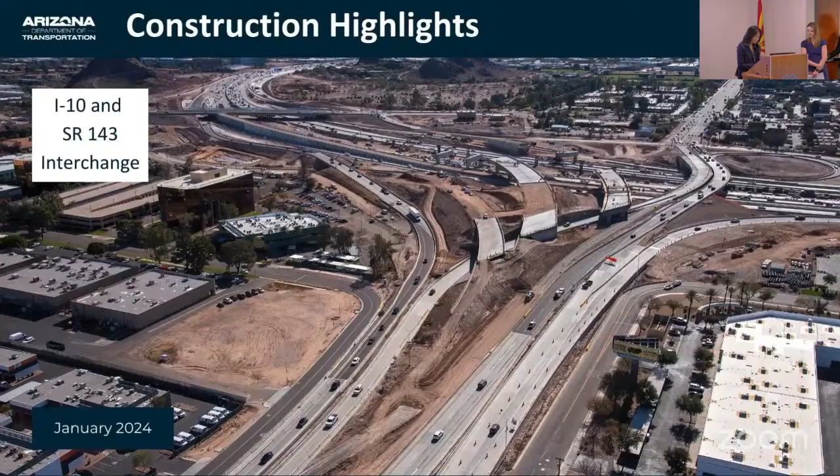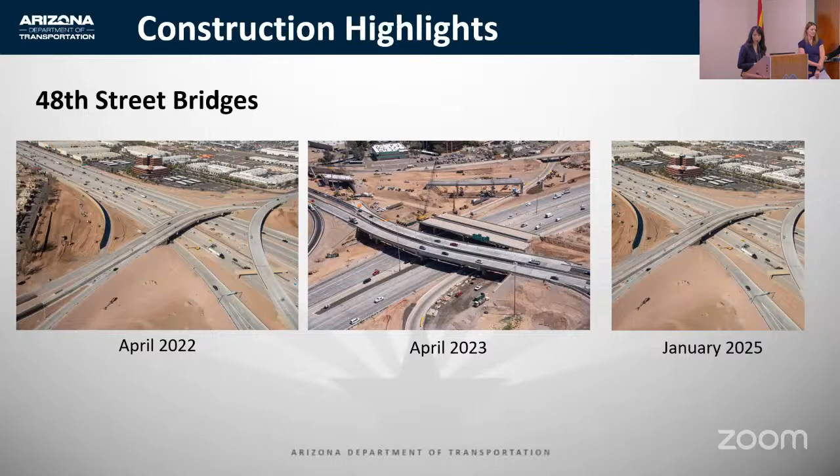As you heard earlier when I was going over the project components, the 48th Street bridges over I-10 were completely replaced. You can see what the bridge looked like in April of 2022 and what it looks like today. The new bridges were constructed next to the old ones, and once traffic was transitioned onto the new bridge, the old bridge was removed.

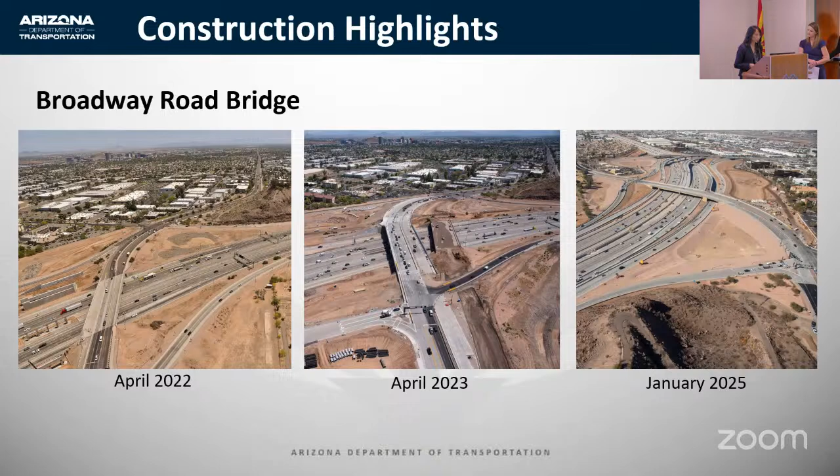The same thing took place at the Broadway Road Bridge over I-10. You'll see what that bridge looked like back in April of 2022 and what it looks like today. Again, the new bridges were constructed next to the old ones, and then the old bridges were removed, and motorists are using that bridge now.

I am now going to pass this presentation on to Nicole. She will highlight some more of the project construction work, and then move on to some of the outreach efforts that were conducted to keep stakeholders, project partners, and the public informed throughout the whole process.

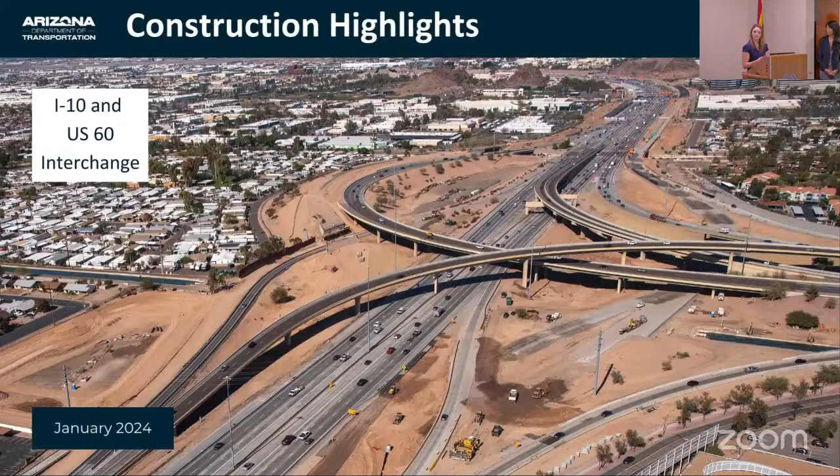Thank you so much. I'm going to pick up our tour at the US 60 and I-10 interchange. It seems like our time lapses aren't working very well, but there's been a lot of changes here since January 2024, most notably the collector distributor roads that were built along the outside of US 60. As part of that work last summer, the eastbound I-10 baseline off-ramp was closed long term so we could reconfigure it so the eastbound CD road would fit into it.

On either side of the US 60 interchange, we have two multi-use bridges going up. One is at Alameda Drive near the Tempe Diablo Stadium. The other connects the Western Canal over I-10 near Arizona Mills Mall.

Since we were last here, we put those final truss pieces in and put the whole piece in at once. That's the part that we'll eventually be walking over.

Since then, the crews have focused on putting in the artwork, which was designed and paid for by the city of Tempe. They worked with a local artist through Collab Studios who was inspired by the fruit of the prickly pear cactus. If you've driven through, you've seen these giant cylindrical structures - those are the fruit. Each bridge has about 10 of them, and they're all now in place.

The fun part is that when we're able to walk on these bridges, you'll be able to see shadow art - as the sun shines through those cylindrical structures, we'll see some art on the bridges. The pedestrian bridges will be one of the last pieces to open on this project, partly because we don't want to encourage pedestrians or cyclists to enter the work zone while it's still active.

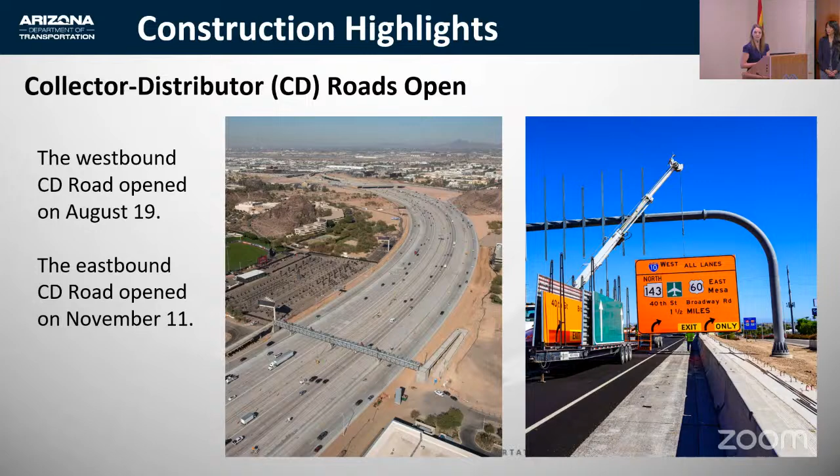The westbound CD road opened in August of last year, and the eastbound CD road opened in November. Because this configuration was relatively new to Arizona drivers, ADOT put together the Find Your Lane campaign to help drivers learn about the roads before they opened. Our campaign reached about 2 million people.

We had 73 social posts with more than 85,000 engagements, and we went out to 26 community events - you may have seen us at a table. We had a fun little map with a Matchbox car you could use to drive your route to work, which allowed us to talk one-on-one with almost 1,000 people to get them hands-on and answer their questions right there.

We did some paid local advertising in local newspapers, and all of our campaign materials pointed back to the project website, where you could get frequently asked questions, directions to destinations in the Broadway curve, and a visual animation of how the roads would operate when they opened.

After the eastbound CD road opened, we did a survey to see if those campaign materials helped. We asked, based on the information you had before it opened, how comfortable were you with driving the CD roads for the first time? 79% of respondents said they were somewhat or very comfortable driving the CD roads for the first time.

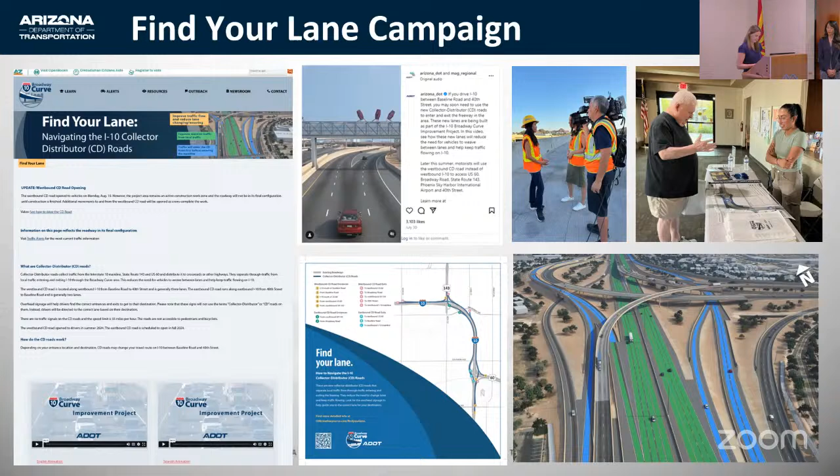You can see all of the materials are still up on the website at i10broadwaycurve.com/FindYourLane. That campaign was just one small aspect of a very large public outreach effort on this project.

It was really important to ADOT that our project stakeholders - businesses, residents, commuters, and regional traffic - have the information they needed to make decisions before they left the house every day. We did things like social media, project tours, canvassing before every single closure to make sure businesses knew when there would be freeway closures, newsletters, a ton of media outreach, and just getting out and talking with people in the community.

So what's next? There's still some work to be done before we have substantial completion later this spring. Crews will need to open up that second HOV lane, which will open at the same time as the dual HOV flyover ramp that Marcy talked about, connecting I-10 and State Route 143 - a pretty critical connection for folks heading to Phoenix Sky Harbor International Airport.

We also have those multi-use bridges that will open sometime in May. Then you can expect to see crews out there doing some final cleanup, landscaping, lighting, final striping, and just getting things ready so we can finally take those orange cones down and open up the road completely.

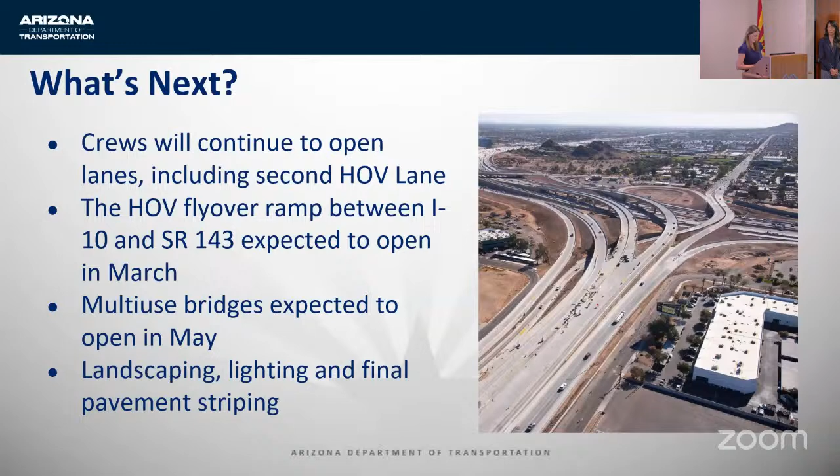We do recognize that this project has been incredibly impactful, so we wanted to close with some of the benefits we are seeing now or will see as we head towards completion. Everything from reduced travel times, improved safety, improved access to Phoenix International Airport, and even some economic impacts.

We did anticipate that we would add some long-term jobs and construction jobs and put some money into our local economy. We recognize those are very important benefits for the people in our communities, for the drivers, for our region. So we want to thank you all for hanging in there with us for the last few years so that we can all see these many benefits at the end of the project.

Fortunately for us, the stars aligned and we were able to take advantage of an already planned freeway closure and get a whole bunch of people out on the freeway, including our field crews, our engineers, and a lot of people who touched the project, our project stakeholders, several of the mayors who are part of this committee, and Governor Katie Hobbs. So I will let Marcy do the honors.